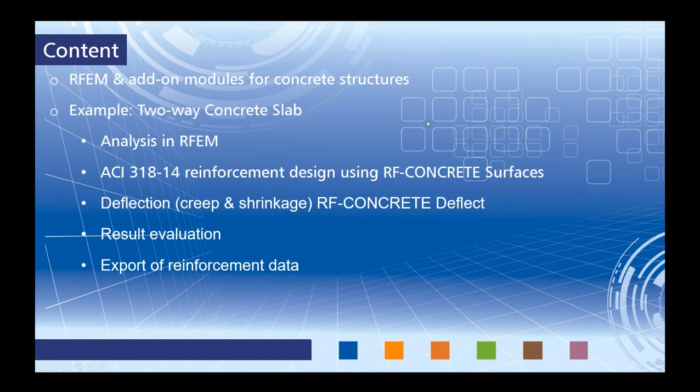And throughout the example, we'll be taking a look at our results, evaluating what they mean and how they can be applicable to our design. And then lastly, I want to show the export of the reinforcement data to a few other programs that you're familiar with, but that we do integrate, so that maybe you can do some reinforcement design details, some drawings in programs such as AutoCAD and other reinforcement programs.

So the concept of the add-on modules for concrete design. Our main program RFEM is where you're going to be doing all of your loading, your modeling. You can apply your load combinations according to different standards. We integrate with BIM software such as Revit, Tekla. And you can also run a full analysis in RFEM. So if you're just simply wanting the internal forces such as your moments to do your reinforcement design by hand, then by all means you can do this in RFEM alone.

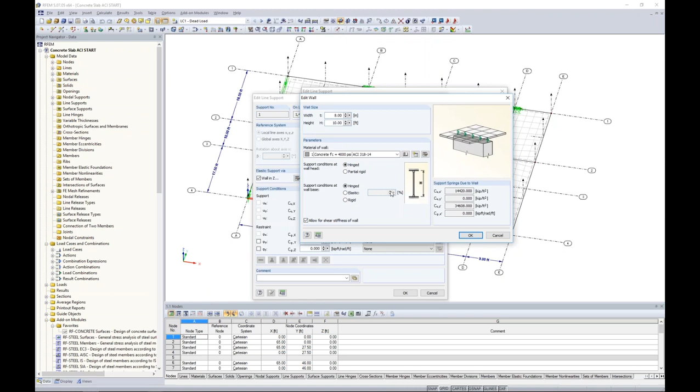So rather than manually entering in what should be these effective spring stiffnesses, you can take this all into account by filling out this edit wall parameters here. So it's a very useful feature.

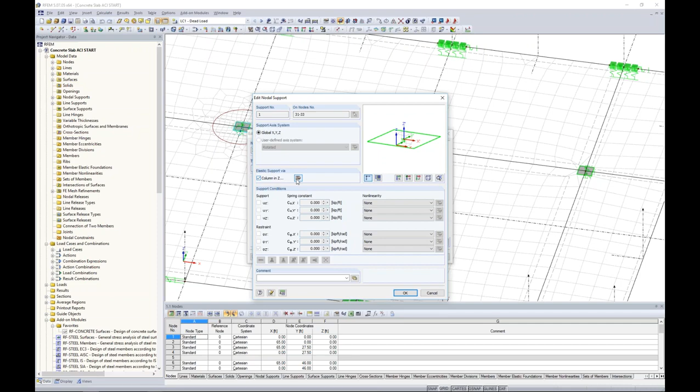And in the same sense, if I zoom in here, we'll assume that this is maybe some type of column supporting it from the underside here. If I double click on my nodal support and go into the details of this, I have that exact same option but to take into account a column instead of a wall. I go into the details here. Again, I'm just defining some of the geometric properties such as an 18-inch by 18-inch column. I give it a material, concrete, 4,000 psi, define the height as well as my support conditions at the top and the bottom. And then again, the program is coming up with these effective spring stiffnesses in both the translation and rotation global directions and applying it into the model.

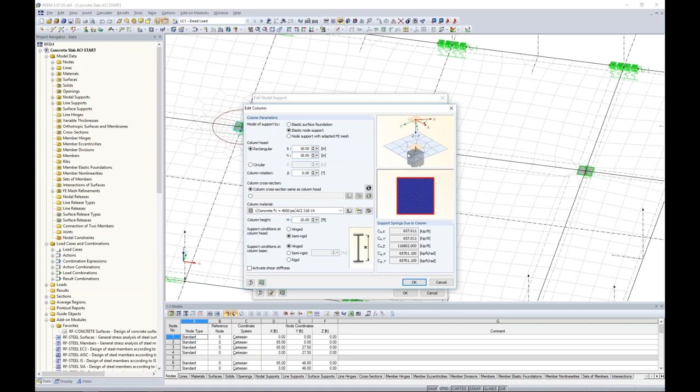So this is nice as well for issues like singularities. With finite elements, sometimes we get singularity where we're applying all of this load at this single node. Well, these specific types of supports help distribute that load over the column head, 18 inches by 18 inches. So essentially, those are just some automatic features we have in the program to take those other elements into account.

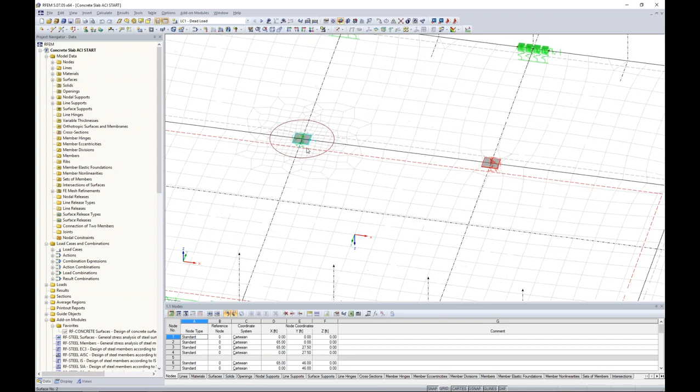You'll also notice that I have my finite element mesh defined here. The default is 1 foot by 1 foot. Maybe around these particular column locations, though, we'd like to define more of a smaller finite element mesh. Now, we could do so for the entire model, but the problem with that is that it's going to really significantly slow down our solve time. So that's why in RFEM, we give you the option for FE mesh refinements.

And what we have is FE mesh refinements about a particular node, maybe a line, a single surface, or a single solid. You can see for this application, I defined this FE mesh refinement about this node. I gave it a radius of 3 feet. I gave it a target FE length on the inner and outer sides. And then what the program is going to do is transition quite nicely from the smaller FE mesh into the larger FE mesh back into our global settings. So again, this provides a smaller FE mesh without slowing down our solve time because we didn't change the entire structure here.

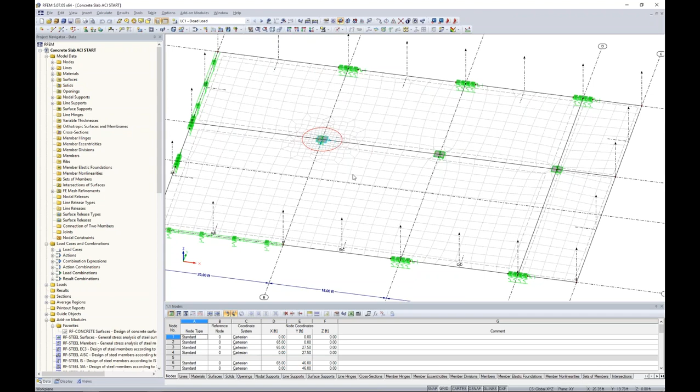Now, in regards to the ACI, it does tell us that we need to take into account some stiffness modifications for slabs. And again, if you were present at my webinar last month, we did the same thing for our columns and our beams. I'm just going to drag my selection box over all of my surfaces, right-click and select surfaces to edit all of them at once.

If I go to this tab called Modify Stiffness, the default in RFEM is set to none. Keep in mind that if you're doing any ACI design for columns, members, walls, or flat slabs, you need to modify this stiffness here according to ACI.

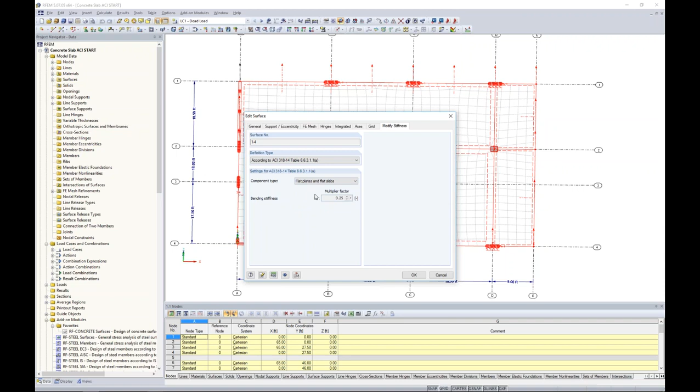We have this simple drop-down box, and now the only thing I need to do is select my component type. Last month we selected columns for our column elements, and we did a separate selection for our beams. For this example, we want to choose flat plates and flat slabs. This multiplies my bending stiffness by 0.25, which comes directly from the code to account for cracked sectional properties and reduce our stiffness. So we will leave all flat plates and flat slabs with this multiplication factor.

The other thing we get asked quite often is how to take into account a one-way versus a two-way slab. When I go to draw a typical slab surface element under my General tab, you can see my stiffness is set to standard. I've defined my thickness as 12 inches. A standard stiffness means a two-way slab - we have no boundaries regarding load distribution in any direction on this surface, so I'd consider that a two-way slab.

Now, a one-way slab, which is quite common as well, can easily be taken into account. Instead of the standard stiffness, we'll want to choose orthotropic here. You'll notice a few examples pop up when I choose orthotropic. I can use this edit parameters box, and a new dialog box will pop up to take into account these different stiffness modifications.

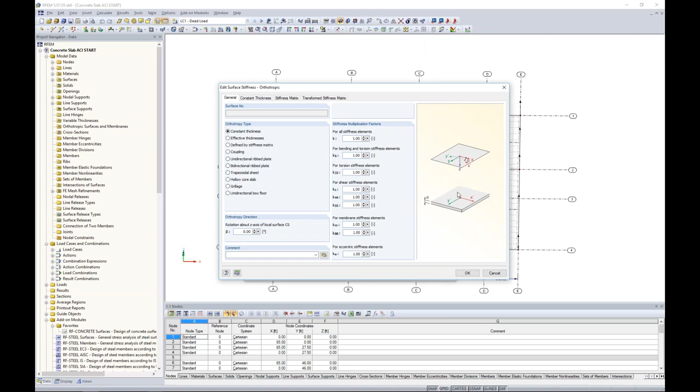The first one under this General tab is constant thickness, which is my standard surface type. There's not much going on here other than, in the same sense as the standard surface, I can now see my stiffness matrix. It's nice because it's divided into sections and very easy to read - we have bending and torsion, shear, membrane, and eccentric effects.

Back on this General tab, if we click the second option, effective thickness, I can click on this tab and define the effective thickness to control my stiffness properties in both the local X and Y directions. So let's say, for example, in my local X direction I'd like this to still be 12 inches thick, but in my Y direction I want to decrease that stiffness because I have this one-way slab spanning with load distribution in the local X direction. So for my Y direction, I can give this a thickness of 5 inches. Now my transformed stiffness matrix will take that into account - you can see smaller values for D22 compared to D11.

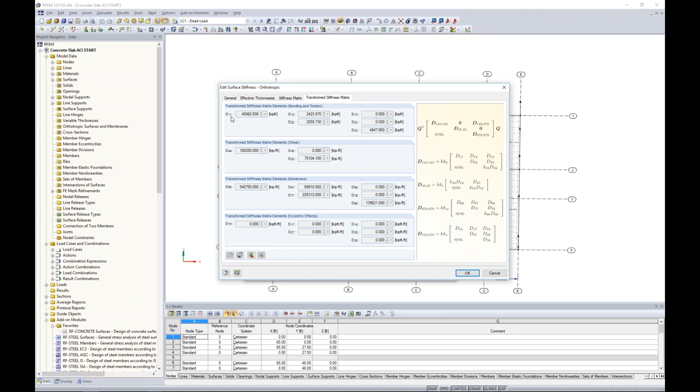Going back to effective thickness, what's also great is that we've changed our thickness, but what about other options such as self-weight? We've implemented an option down here under thickness to still take into account the full 12 inches for consideration of self-weight. So the only thing we're affecting here is our stiffness - that's an option for a one-way slab.

Now back on the General tab, we have a few other options - for example, defined by stiffness matrix. You can enter your own values here for your stiffness matrix if you know them. We also have a unidirectional ribbed plate and a bidirectional ribbed plate, denoted here by these pictures.

If I click on the second tab here, what's great is I only have to define the geometric properties. In this picture, I simply define these length directions in these value boxes, and the program will automatically calculate the transformed stiffness matrix for me. Something like a trapezoidal sheet might be useful for a metal deck.

We also have hollow core slabs and unidirectional box floor, so maybe something more like a box girder type application. Again, the only thing you have to define are these geometric properties, and the program will automatically take that into account for our stiffness.

We also lastly have grillage, which is maybe something more like a waffle slab, again just defining those geometric properties on this second tab here.

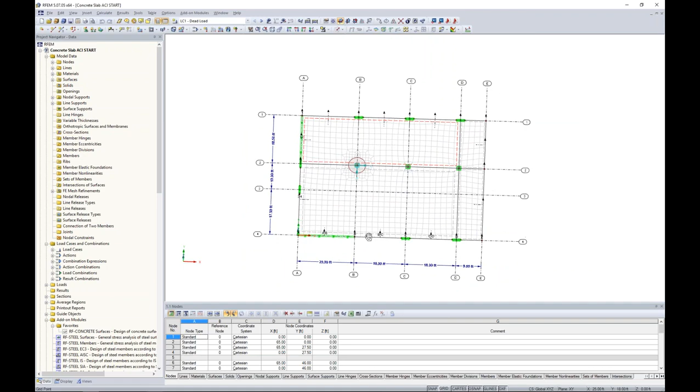One last thing to take a look at are our loads. If I turn this into the ISO view and turn on my loads, I can see that I have applied a dead load, a typical kips per square foot area load on all of my surfaces.

Now I also have 4 different live loads applied. If I scroll through these 4 different live loads, you can see they jump around on the slab. Maybe this is representative of something like office loading, where you might have some part of the structure loaded but not other parts. Maybe all of them will be loaded at one time.

This is quite a common question we get: how do we load our slab so we're not loading the entire slab, but maybe just a portion of it? That can easily be done with our free loads. Using our drop-down box, we have free concentrated loads, free line loads, rectangular loads, circular, polygon, and variable.

If I double-click on one of these free loads to open up the dialog box, you can see we have everything here. It's pretty self-explanatory. You just go through it one by one.

The first thing we need to choose is a projection plane, so we want to project this load in the XY plane. We want to choose a load direction, and you'll notice my little picture up here updates as I choose these different options, so it's nice I know exactly how I'm applying this load. I want to give it a magnitude, and then I simply click 2 locations on this slab to define my rectangular surface area.

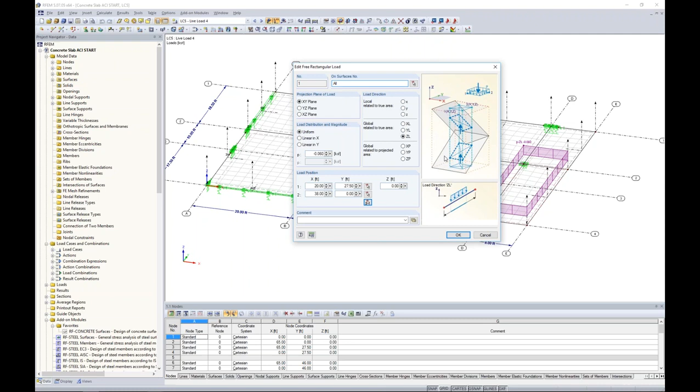We have the option to actually project down through a series of slabs depending on what plane you choose here. By choosing this option right now, it's set to all because it doesn't matter since I only have one plane in my XY direction. But if you had multiple surfaces on top of one another, you can choose those surfaces you want this load projected down onto with the click of a button, so you're not individually applying each of these free loads at each level.

Lastly, if we go to start a new model, or once I've created it, I can right-click on my model name and go into my general data. The program asks if we want to consider load cases and combinations according to a specific standard.

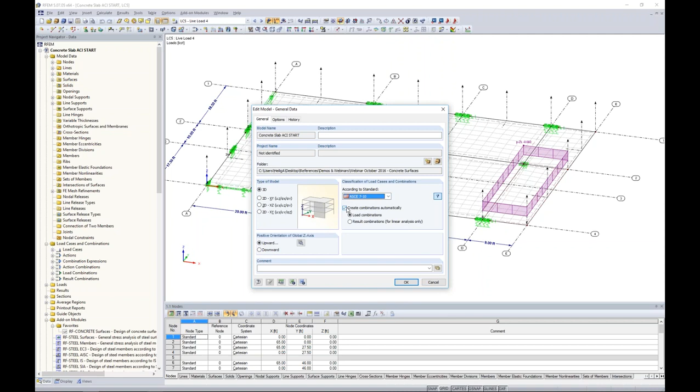We can automatically create these load combinations. We have the ASCE codes, the IBC codes, Canadian codes, as well as many other international codes. I have this checkbox checked on to create load combinations automatically according to ASCE 7. You can always turn this off and create your own manual load combinations, or you can do both.

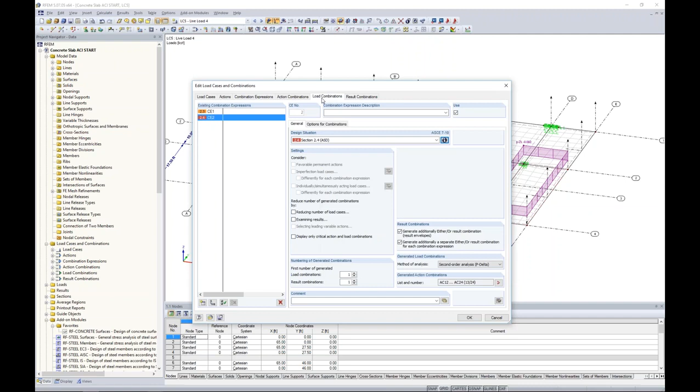For our load case, since we are doing ASCE 7 load combinations, you can see under my combination expressions that my LRFD load combinations will be created according to this orange box, and my ASD load combinations according to this red box. If I click this info button, it will show me which load combinations are taken into consideration directly from this code. Jumping to the load combinations, it's really drawn out here considering all of our applied loads.

I wanted my live loads to be applied in all different scenarios. Maybe live load 1 and 2 act at the same time, or 1, 2, and 4, but not 3. The program can automatically take that into account because under our Actions tab, I've set my live load as simultaneous. So basically, the program's going to come up with all the different scenarios these live loads can act together.

We also have options for alternatively or differently here. So then I have all my LRFD load combinations listed in the orange, and all my ASD in the red. Under my results combination, this is nothing more than an envelope solution for our LRFD equations and the envelope solution for our ASD load combinations.

So everything you've seen up till now involves RFEM. Like I said, we can easily run an analysis now to get our internal forces to do our design by hand. But the purpose of today's webinar is to show you guys how to utilize these add-on modules in order to do design according to the ACI code.

So the first thing I'm going to do is launch my RF Concrete Surfaces add-on module. For those of you not familiar with our software, this is an add-on module, nothing more than a simple dialog box that pops up within RFEM.

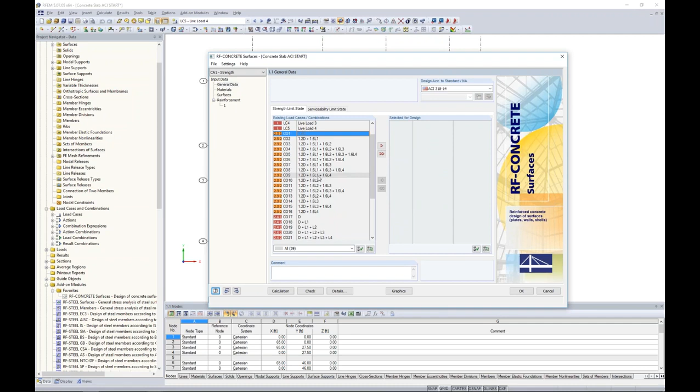Now, this particular first case that I'm going to run, I'm going to rename it. And you can see the default's just reinforced concrete design. I'm going to name this strength. For this first case, we're going to focus on just the strength limit state here. So what I first want to do is to select all of my LRFD load combinations for design.

You'll notice that I use the drop-down box here to select ACI 318. And then the only thing I need to do is just to simply work down this list here. So I have my materials list here, again brought in from RFEM, 4000 PSI, grade 60 reinforcing steel. I can quickly change this if I'd like to within the module. I don't have to go back into RFEM. All of my properties for my materials are listed here. I have a nice stress strain diagram for both my concrete and my steel.

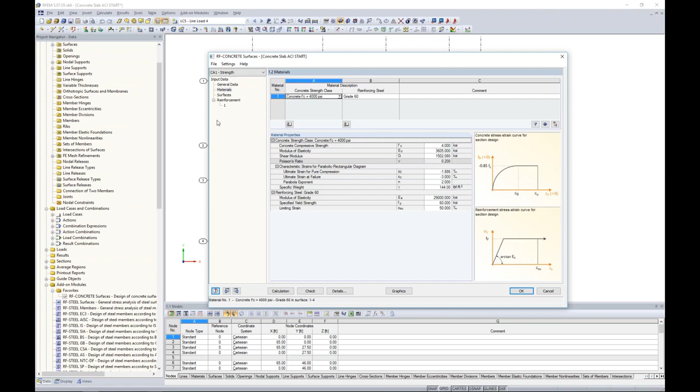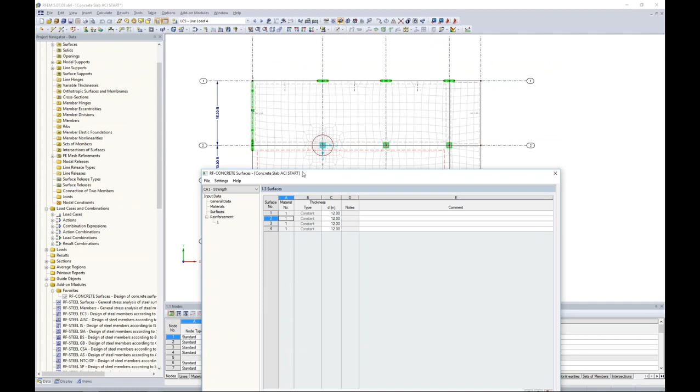Moving on down to surfaces, nothing too extravagant here. This will change later on when we're considering serviceability, but for strength, it just simply lists our 4 slab types and then the depth of each one. Notice too that everything with these tables is synced up to the graphics behind it. As I scroll through these different slabs, you can see the red dotted line highlighting which slab I'm actually clicking on in the table. And lastly, we want to jump to reinforcement.

For our reinforcement, you can create as many groups as you'd like. So perhaps you have different slabs with different loads, different thicknesses. Of course, you're probably going to want to consider different reinforcements for these slabs. You don't want to have a one-size-fits-all for everything. So we allow you to create more than one reinforcement group. And you can see here that right now I've applied it to all of my surfaces by checking this checkbox. But by all means, you can apply it to an individual surface, a group of surfaces, or all of the surfaces. For this particular case, we'll just choose one reinforcement group.

You can see here my reinforcement ratios on this first tab. There are a couple of defaults already set. You can change these. The ACI code tells us the maximum reinforcement percentage, basically this is to avoid brittle flexural behavior in case of an overload type situation. In the newer ACI codes, essentially, they've gone away with the reinforcement percentage, but now are more focused on the net tensile strain of the concrete being greater than or equal to

0.004. So what the code's telling us is that you can essentially mess around with these percentages as much as you want, as long as those net tensile strain limits are met. 7.3.3.1 and 8.3.3.1 from the code refer to both one-way and two-way slabs, and they both state the same thing, that that net tensile strain must be met.

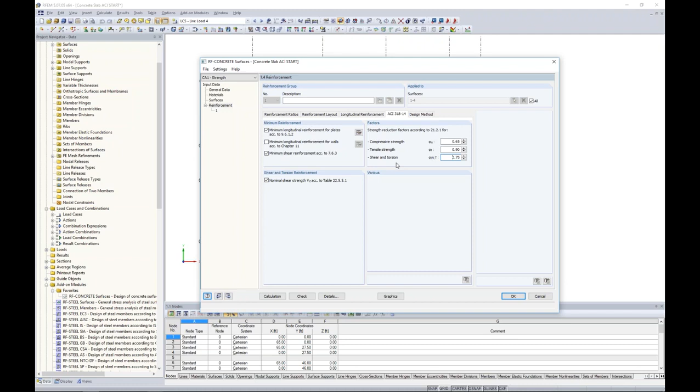ACI 318-14, this is just some standard references. Minimum longitudinal reinforcement for plates is selected right now. We also have walls if we were doing wall design. Minimum shear reinforcement and nominal shear strength, some standards here. Our strength reduction factors come from the code, section 21.2.1. If we've done any type of concrete design, we're familiar with what these strength reduction factors are, and the default is set to what the code calls us to do at the moment, but you can certainly change those as well.

Design method. Here we can design for optimization of design internal forces or no optimization. I have this left as a default for optimization of design internal forces. And the only thing that we need to do now is just to run a quick calculation. So what is going on in the background is that we're running all of those LRFD load combinations in RFEM, and it's bringing all of these internal forces into the add-on module so that we can get our reinforcement strength design. Then all of these results will be shown directly in this add-on module.

So you can see here that our results tab popped up down here at the bottom after we ran our analysis, and basically this total will just be a summary of what's required. I have my As1 in the top direction for both 0 degrees and 90 degrees. I have As1 and 2 in the bottom direction, so that's 0 degrees and 90 degrees, and then I have my required shear reinforcement. What's also nice is that we have this little design details button down here.

If I click this, this is all of the information that you could possibly need to understand where the forces came from, where the design numbers came from. You can see here that these are all collapsible, so you can really get into detail. What I really pride our program on is we're not a black box program. We get very few tech support questions on engineers not understanding where the numbers came from within the program. So we try and give you as much information as possible.

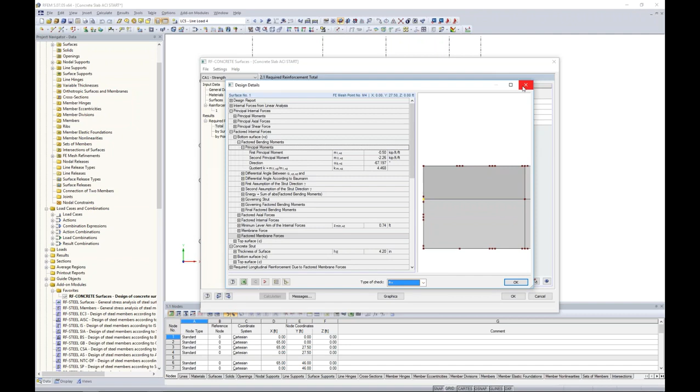And what's great too is that we even show you the FE mesh point, and we show you where you're at on your slab surface. So this is our slab surface that came from RFEM. You can export all of this information to Excel at the click of a button to do some further sorting. You can print this information. We can easily jump to our longitudinal reinforcement down here for both top and bottom, and to our shear reinforcement. So again, if you have any questions about where this design information came from, that's probably available in these design details.

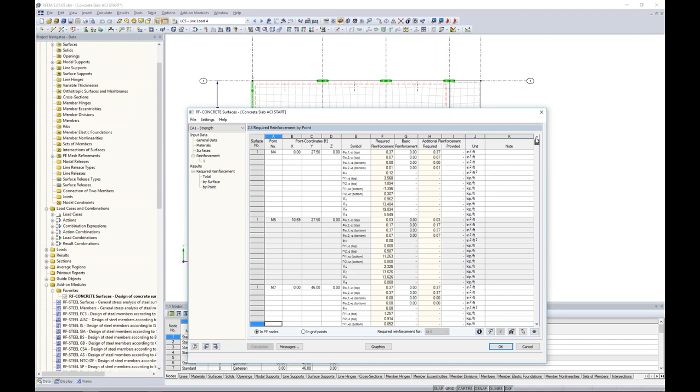We can also view this reinforcement design for each surface. Again, we synchronize the table with the view in the background in RFEM. So this big red arrow is always going to tell us where we're at according to this point number here, and the surface is highlighted as well, showing you which surface you're looking at, which is surface number 1. And then we can view it by point. This is a rather extensive table, as you can see. These are the different FE mesh points throughout the program. Again, as I click through them, the picture in the background will sync with where I'm at on the table.

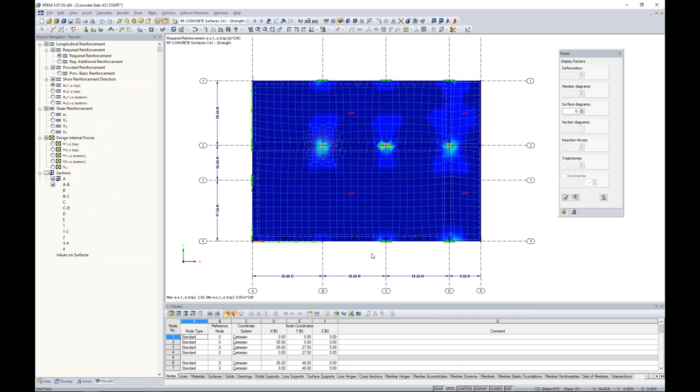So this is all great in terms of tables, but probably we want to view something graphically to kind of get a sense of what is the overall behavior of our slab. So all I need to do is just to click my graphics. Now, looking at my slab, you notice that I have these nice contours now. I now have this Results tab available in my Project Navigator.

I know I'm in my Concrete Surfaces add-on module still because, as you can see, I have all my different load combinations, but we have RF Concrete Surfaces selected in our drop-down box. Now, I can see my required reinforcement. I have my nice table here to show the different contours and in inches squared per foot, what exactly is going on.

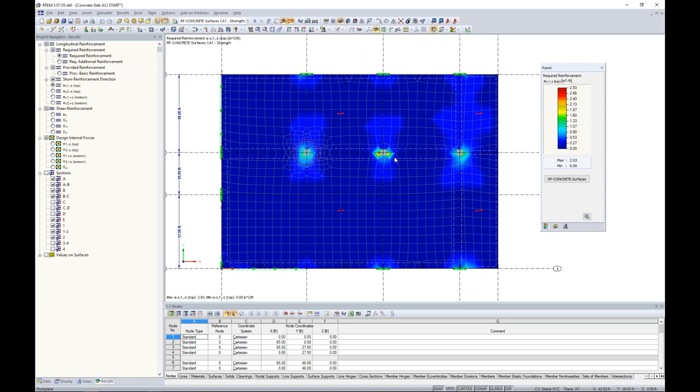If I take a look at my reinforcement direction, I have this red arrow indicating which direction my reinforcement is spanning. Now I can scroll through my AS at the top in the 90-degree direction. And it makes sense what our contours are showing here. For our top reinforcement, we're going to need more around these column and wall supports because we have a negative bending moment. So we're going to need more reinforcement in our tops.

Now, if we look at the bottom reinforcement, it's going to make sense that we're going to need more reinforcement at the areas spanning between our supports because this is an area of positive moment. We can also view AS bottom in the other direction, and you can see here that we have quite a bit more reinforcement needed for this direction.

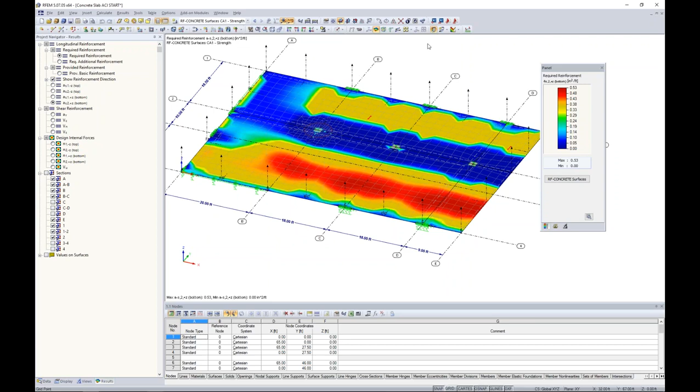So contours are great, and I think it kind of gives you more of an overall sense of what's going on, but we also have an option for sections in the program. And what a section will do, and that's what these black lines indicate here, I went ahead and created some different sections throughout the slab. This is basically a cut right through the center of the slab. And the first thing that we can do, we can turn off our isobands for our results.

And to create a new section, I can just simply go here to create section numerically. Now the program's asking me if I want to name it. It's asking what should we put the section through? We want to put it through a surface. I just simply need to click 2 points. I can always use my drawing grid to make sure I have a straight line here. And then just the projection direction here.

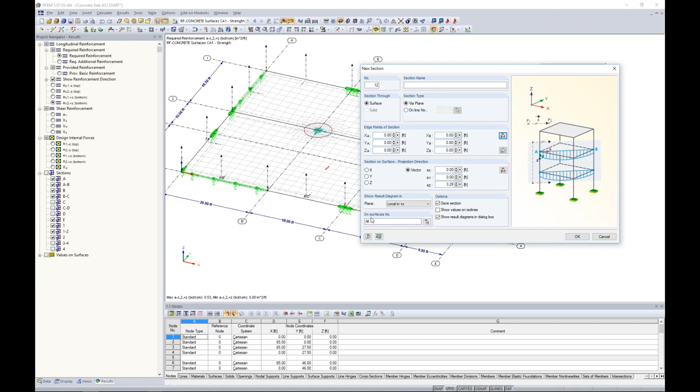And what's also great is that we can select all surfaces here, or maybe we only want to view this section for a particular slab. Well, everything is in your control within this dialog box. So I went ahead and already created these sections, as you can see in both directions, and then we can just simply turn on our sections at the click of our button instead of the isobands.

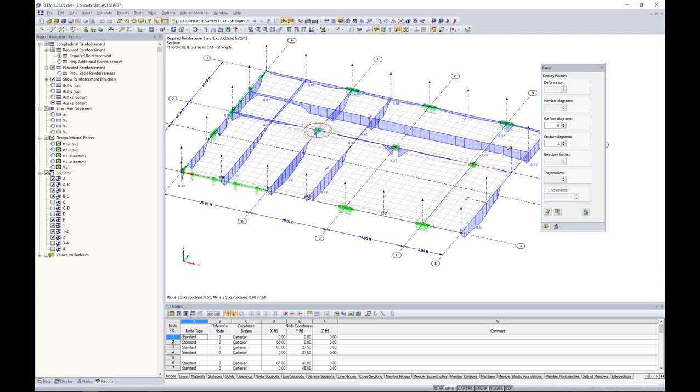Then we have the sections over here, and here is where I can really control what I'm looking at. You'll notice that right now I have my reinforcement direction for my as2 bottom, so I can see my reinforcement is spanning in the north-south direction. But now I'm getting more of a numerical value to look at rather than contour lines.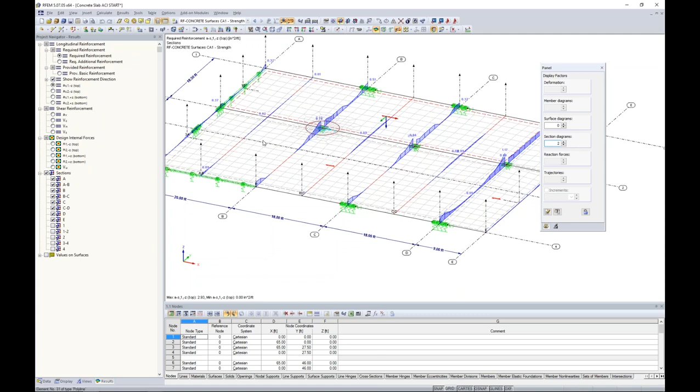So I can see here, if we go ahead and turn on a few of these other sections across the slab, if I'm looking at my top reinforcement and I increase this section diagram, it makes sense that I'm going to need more reinforcement again around these column supports because we have negative bending moment. If I take a look at my AS1 bottom, you can see I have significantly more reinforcement required at areas spanning between the supports.

And with these sections, it's nice as well. I can always right-click and go to my results diagram, and I can view it more so along the length in quite a bit of detail, more as numerical values. I can add in as many diagrams as I want. Let's say I want to view this section for both top and bottom, and in both directions, 0 degrees and 90 degrees along the length. And now I can really compare what's going on in all my reinforcement directions.

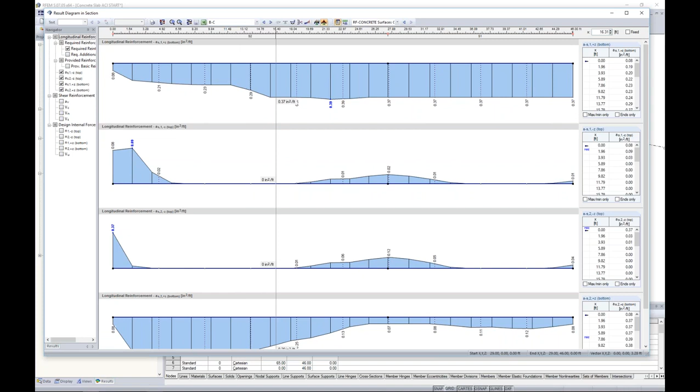You can print this off as well, and quite a few quick links here. I can switch my sections at the click of a button. I don't have to necessarily go back to RFEM. I can also export directly to Excel. So that's certainly a useful feature if we're wanting to view things more as numerical values rather than contours.

Okay, so now that we've done a basic strength design, we want to move on to a service design. So I can easily jump back into my add-on module by going to this drop-down box here and choose current module. And I'm now back in my concrete surfaces.

So for this option, I'm going to choose copy case. And what the program's going to do is it's going to copy my strength load case, and I'm going to rename it strength and service with some basic reinforcement. So now I'm going to design for both strength and service, and I'm also going to take into account some basic reinforcement design. I click OK.

So now you can see that I can jump back and forth to both cases. And by all means, you can do all of this within one case if you like. I'm just trying to show you guys a clear, distinct difference between all the different areas that we're applying these different design applications. So now we're under strength and service. I go under my serviceability limit state, and here is where I'm going to want to select all of my ASD load combinations.

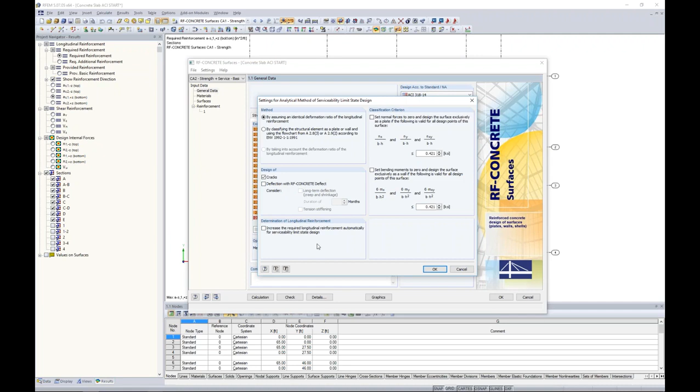So now that I've defined a serviceability limit state, my materials, everything's the same here, but notice my surfaces tab has a few more options. The tab down here, limit of crack widths. So the first thing that we want to do with our serviceability is to tell the program, well, what are my limiting crack values? What can I base this ratio off of, and what's limiting the total width of the cracks based on the applied load?

So the ACI committee did quite a bit of research and determined that, depending on where your structure is located, there are some crack widths that we can follow for limiting dimensions here. So for our example, maybe we consider our structure in a very humid environment. Well, then I'm going to set my crack width under this selection as 0.012 inches. Now you want to control both the top and the bottom. You can certainly set these as different as well, but for our case it will be 0.012. We can also choose user defined. Maybe you have a different limiting value that you'd like to put in here. You can do that as well.

Design without direct crack width calculation according to 24.3.2. The ACI code tells us in section 24.3.2 that it's not so much a given equation for what we should limit our crack width to, but the code tells us that we should really limit our spacing of our longitudinal reinforcement to decrease the cracking of our concrete. So by having this selected, the program will know to follow the stipulations that the code calls for in this section to limit our spacing of our longitudinal reinforcement.

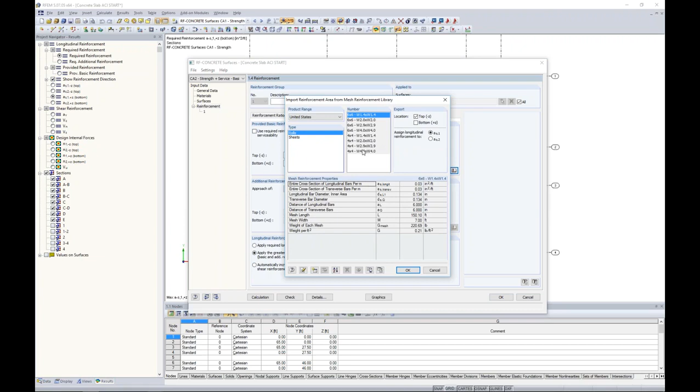Now, if you jump down to the United States, we have welded wire fabric reinforcement already an option to select here within the program. I know when I did design for precast concrete bridges, we only used welded wire reinforcement. So this is nice that you don't have to manually apply these specific properties of our reinforcement, but you can bring them up from this library directly here.

For our example today, we'll probably be using reinforcement bars at a specific spacing. So that will be this option right next to it. You can see here that the only thing I need to do is to specify the diameter of my rebar. So maybe if we try number 6s, we'll use 0.75 inches for our diameter. And the rebar spacing, let's try 10 inches on center. And I'm going to apply this to both the top and the bottom, and both the 0 degrees and 90 degrees. If I click OK, you'll see the program automatically fills in the reinforcement area for all directions in both the top and the bottom.

Additional reinforcement for serviceability state design. I have a little drop down here, and if I click on this info button, this gives me a little bit more information of exactly how this is being applied. Right now I'm just applying the provided basic reinforcement across the entire span of my slab, and then any required reinforcement will additionally have to be taken into account.

With that, everything else stays the same, and we can easily run our calculation. Now, something to take note of, it will take a split second longer because now we're running all of those ASD load combinations as well for our crack width design. And we're still running LRFD to get our required reinforcement design as well. And it will bring all of the results back into this add-on module directly.

So as we saw last time, we have our required reinforcement. Nothing should have changed here because we didn't change anything in our external model in RFEM, but now we have a serviceability design available here. You can see that I now have my crack width control, my crack width ratio. I have my green smiley face because I am well below my design limit value that we set at 0.012. My existing value is 0.006. And you can see where this comes from, the Gergely-Lutz equation that I explained before. We're actually calculating a specific crack width. We're also meeting the allowable spacings according to the code that we set in the limiting factors as well.

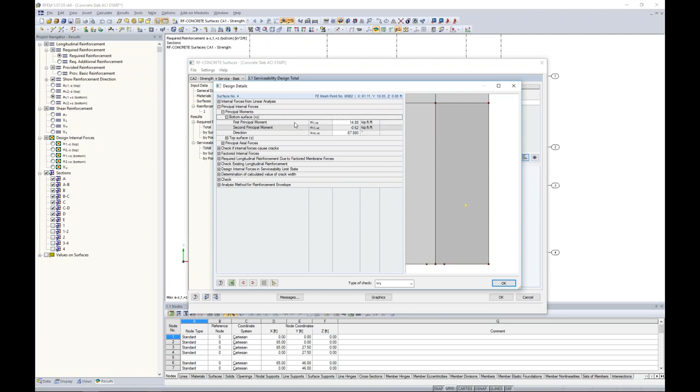Again, you can press this info button to get all of the possible information that you need and which location you're looking at exactly for how those calculations were derived. We can view each one by surface again, just like how we saw in our required reinforcement. Now we can view the cracks at each particular surface, and we can also view them by point. Again, we can jump to our graphics view here, and I'm going to turn back on my ISO bands, turn back off my sections, and now we have this whole serviceability limit state design.

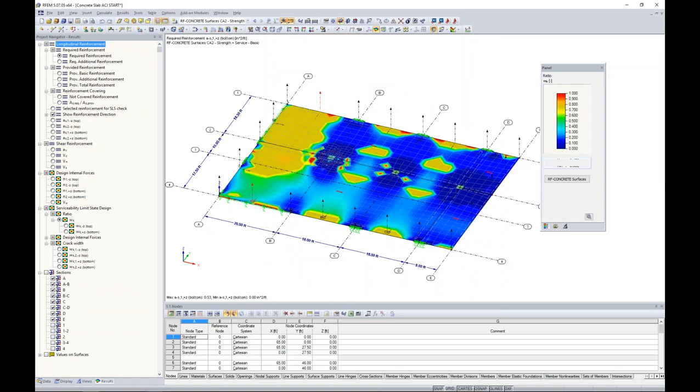So I can actually view my contours for my crack widths as ratios. So you can see here nothing is in red, so nothing is greater than 1. I can view each crack ratio by the top, and this kind of makes sense what we're seeing. We would expect cracking to occur on the top near the columns where we have negative bending. As for the bottom, again, this is exactly what we'd expect. We expect to have cracking in between our supports on the bottom.

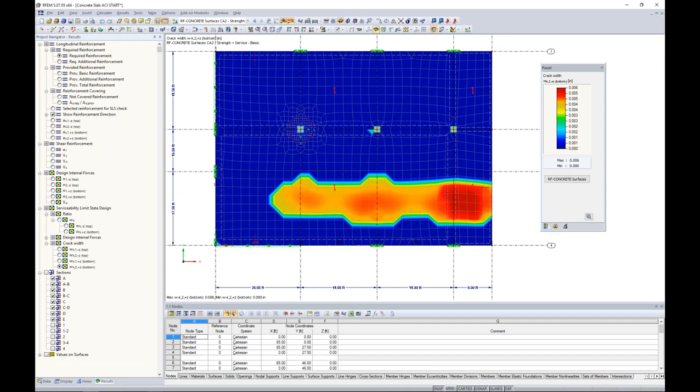We can also view the crack width numerically according to the Gergely-Lutz equation for both the top in either direction and the bottom in either direction. And just like before, we can always turn on these sections here, turn off our ISO bands, and view them more numerically if we'd like. So that's also an option. So turning back on the ISO bands, and now that we've seen the serviceability design, we did add in some basic reinforcement. So we now have some additional options up here.

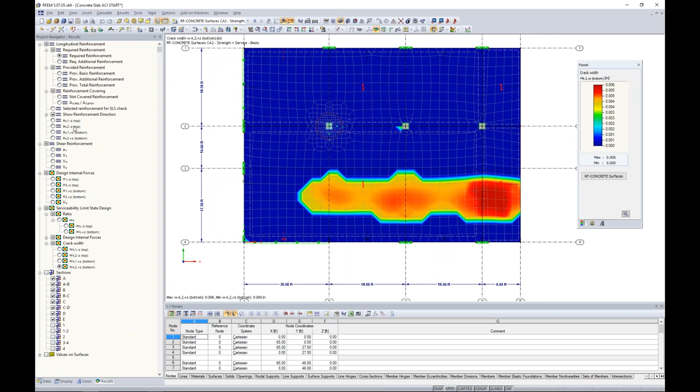I have my original required reinforcement for, let's say, my top and my bottom. This is nothing different than what we saw before. But now you'll notice under my provided basic reinforcement and my little panel here, it's telling me I now have 0.53 inches squared per foot across this entire slab. No matter which direction I change it in, it's still 0.53. That's because we applied the same number 6s at 10 inches on center, top and bottom in all directions.

Now, here's where the fun part comes in. So we provided these number 6s at 10s, but how does that compare to our required reinforcement? Well, we have a nice feature here called As required over As provided. This is showing us our ratios.

If anything is over 1.0 here, we know we have some issues to deal with in terms of adding more reinforcement. If we jump to our top reinforcement, we obviously have some areas near these columns and wall supports that we simply need to add more reinforcement to.

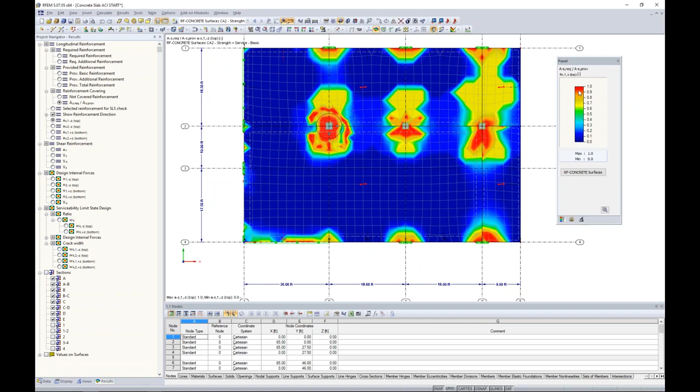The number 6s at 10 are not meeting what my requirements are. I can see that based on these contour lines. Same thing with AS top in the other direction, and then I can view my bottom as well. The bottom's a little bit better, but maybe we have some overstressed situations down here where we have a longer span. So how exactly do we deal with that?

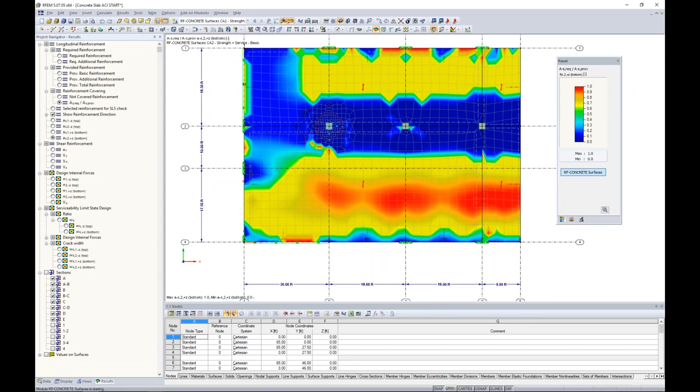This is where we want to jump back into our RF concrete surfaces add-on module. Under reinforcement here, and longitudinal reinforcement, this is where we're going to provide some additional bars at a specific spacing, maybe around those columns and wall supports. Under the Details tab and the Reinforcement tab, we have either the automatic arrangement of our reinforcement or the manual definition of the reinforcement areas.

I'm going to choose manual definition, and you'll notice that the display really changed quite a bit when we selected that. We now have this provided additional reinforcement. This is great for you as an engineer if you want to have a lot more control over where you're placing your specific reinforcement, if you want to tell the program, hey, this is what I'm going to put in, can you tell me if it meets what is required?

You'll notice that I have my provided basic reinforcement still here. We can certainly leave this in here and it will be applied to the entire slab just like what we had done before. But I'm actually going to zero these out because I'm going to apply these number 6s at 10 inches on center manually. We again have several options here: we can apply it as a rectangular reinforcement, polygonal, or circular. So we really try and step outside that simple box - if you have a structure that requires a circular reinforcement area, it's no problem in the program.

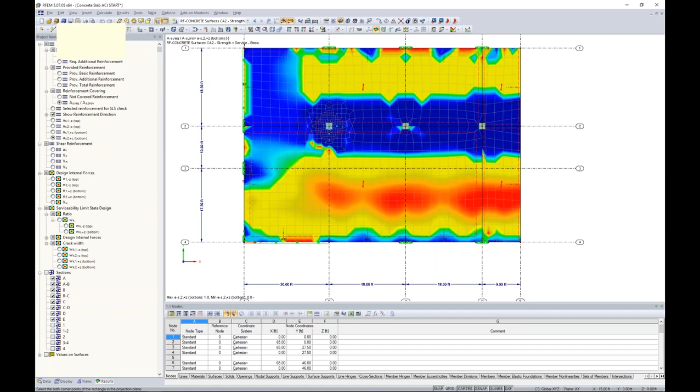We can pull out this welded wire reinforcement if we'd like according to these rolls or sheets, or we can define our diameter of our rebar at 0.75 at 10 inches on center. I want to apply this to both the top and bottom in the 0-degree direction. I simply choose my 2 points to apply my number 6s at 10, and I'm going to choose the entire slab here. I click OK, and now I have this table available that shows I've applied to both top and bottom in the 0-degree direction, number 6s at 10 inches on center.

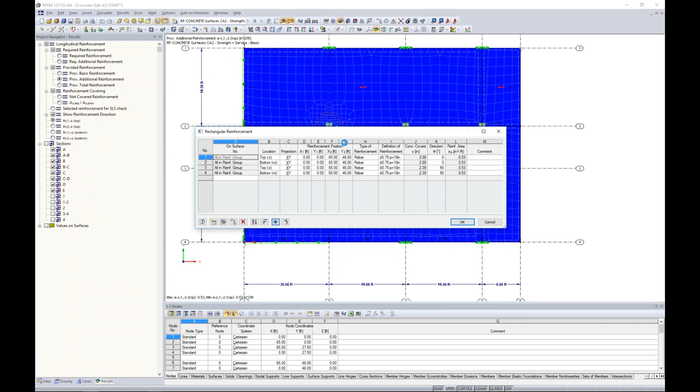I want to also use that same dialog box, but I'm going to change that to 90 degrees. The program remembers my input from last time. I click OK, and now I have top and bottom in the 90 degree direction. The other thing to take a look at is we can view all of this visually. So now if I turn on my panel here, I can see I have 0.53 according to this table in all my different directions.

Now the whole purpose of this was to add some more reinforcement around our columns. So I'm going to go back into this dialog box, and I'm going to change this back to 0 degrees. Let's say around our columns, we maybe will want number 8 at 8 inches on center - so quite a bit more reinforcement there. Our diameter will be 1.0, and our bar spacing will be at 8 inches on center.

Now, instead of selecting 2 specific points, we can use this other option to select a rectangle. Now I can select the center of my column and simply expand this out so that my additional reinforcement is now as a rectangle around that particular column.

I click OK and look at my table. It's existing here in the 0 degree direction. I want to do the same thing again, so all I have to do is change this to 90 degrees. You can also use some copy and paste options in the table.

I think it's easiest to just go into the dialog box again. That's the most user-friendly way to do it.

Now if we view this, we can see that we have our additional reinforcement around this column. We can see the total number in inches squared per foot for both the top and the bottom. I can view all these different top and bottom views back in RFEM while I'm still looking at this table.

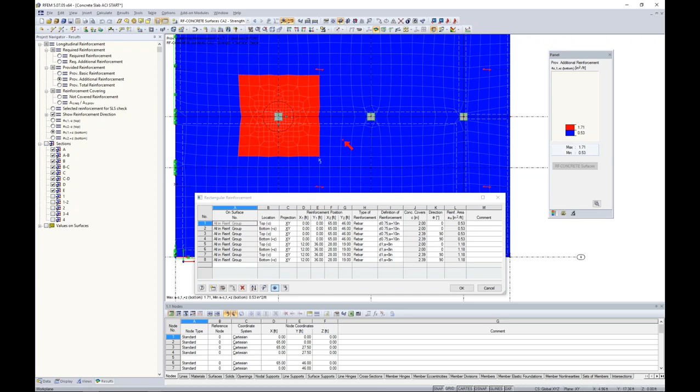If I just highlight my last 4 rows that pertain to this particular column, we have a move or copy feature. What I can do is select one, copy, and all I need to do is click from one column to the other to define my displacement vector. I click OK, and now all of those options from this first column were also copied to the second column.

So a very quick, efficient way to do this when you have a lot of repeat areas, such as columns like these, where you simply need to have the same reinforcement at all locations.

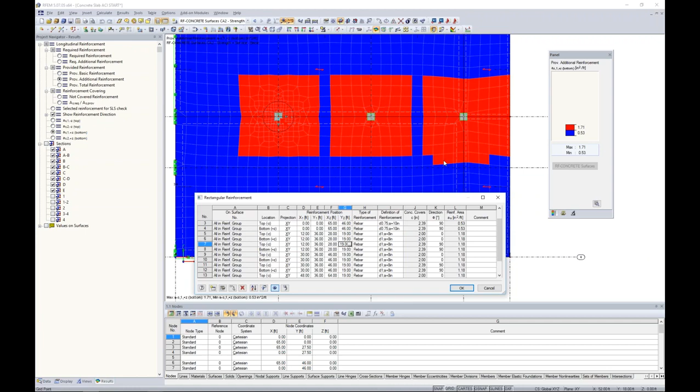Now I can do the same thing for my last column with my move and copy. By just selecting my displacement vector, I click OK, and easy enough. Again, you'll see that it really is applied to the FE mesh, not as a perfect rectangle.

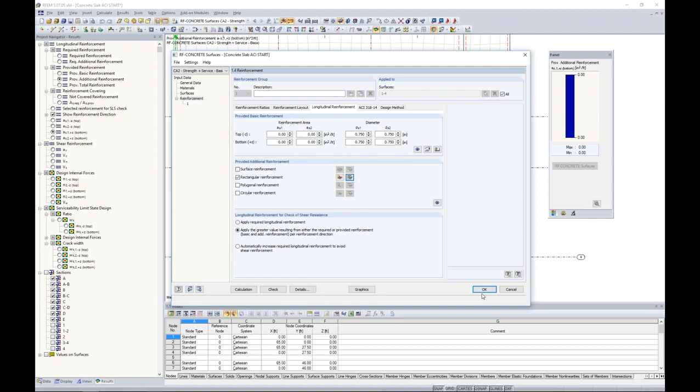So I probably want to do the same thing at my line supports here for my walls. We had some high bending moments at these locations, so I want to do the same thing, but rather than take the time during this webinar to copy and paste and draw those all in, I'll just pull open another model where I've already done so. You can see here that I did the additional reinforcement to all of the wall locations.

You'll also probably notice I left this column blank, and I just left it at the number 6s at 10 inches on center, and there's a specific reason for this. I want to show you guys back in RF-CONCRETE surfaces.

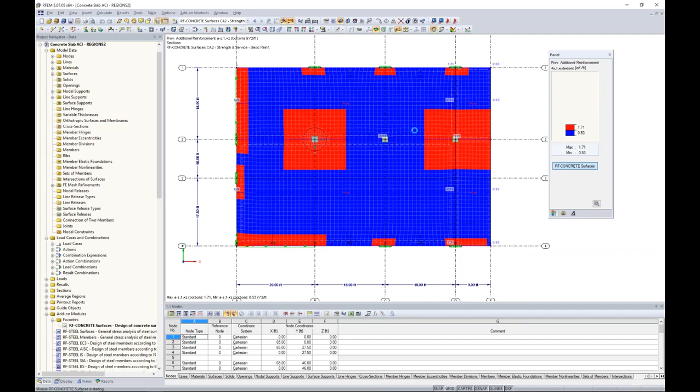So now that we've applied this to our different locations under my longitudinal reinforcement, you can see that my table is much more extensive here, much longer than what we saw before.

Now that I've defined these, I can go and run my calculation, and I can take a look at my same reinforcement results, total. For the total required reinforcement, I still have my crack width telling me here what my serviceability design is, but you'll notice that I have...

...something here. I have a message, 225. 225 down here, or I can click here, is telling me my longitudinal reinforcement in one direction is not sufficient. No check possible. Well, the reason for this, if I go back into my graphics and we take a look at our required reinforcement...

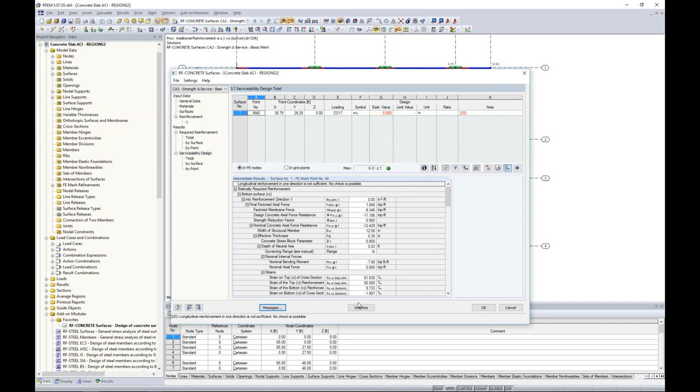...again, this is nothing different than what we've already seen in our other add-on modules. We can smooth the color transition here to make it look familiar to what we saw before.

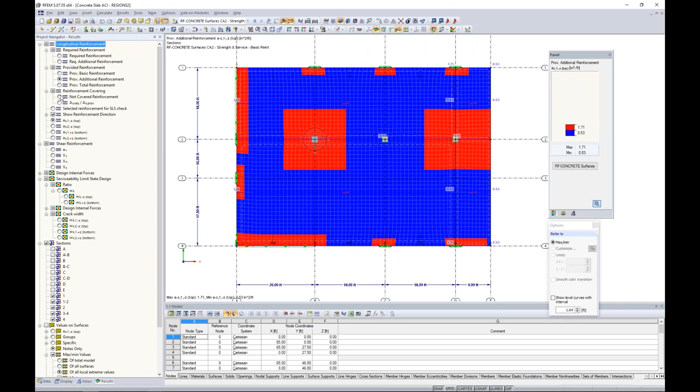But now for my provided reinforcement, I'll click on my provided additional reinforcement here. This looks familiar to what we saw before. How about we take a look at the not-covered reinforcement?

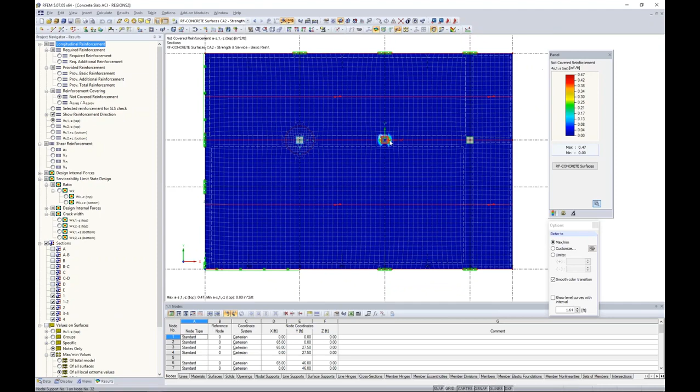I'm at my AS1 in the top direction, spanning left to right, and everything looks to be zero, but that column location where I specifically didn't increase my reinforcement. So the program is smart enough to tell you that you simply don't have enough of your provided reinforcement to meet what we found for the required reinforcement, and that's specific to this column location.

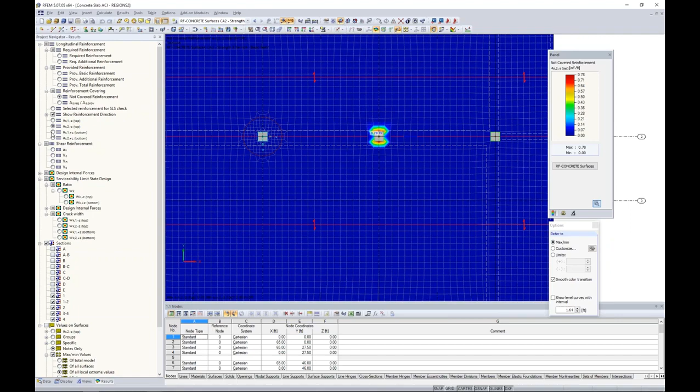If I look at the AS top in the other direction, same type of scenario. You'll notice these other columns are okay, because we provided quite a bit of reinforcement there. If we look at our bottom, you'll notice that everything is zeroed out, looking just fine with the provided reinforcement in both directions for my AS required over AS provided.

I can even look at those ratios again, and you can see quite clearly where we've added more reinforcement and where we haven't. You can see all of the red still occurring at this particular column. So how do we deal with that?

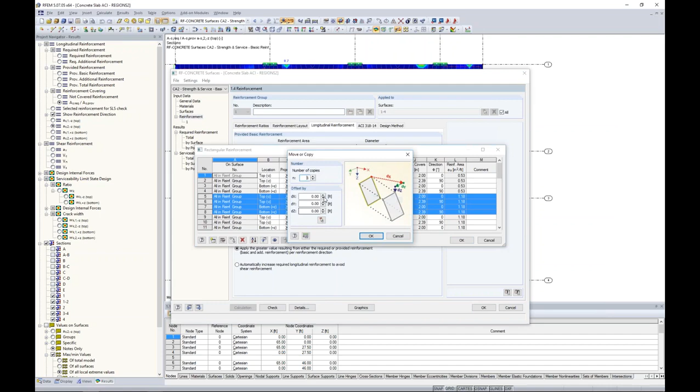That's no problem, that's exactly what I was showing you guys before under longitudinal reinforcement. Maybe I want to take my rows here, 5 through 8. I'm going to use my move and copy tool, select my displacement vector, click OK, and view this graphically. Now we have additionally applied all of this reinforcement to this column.

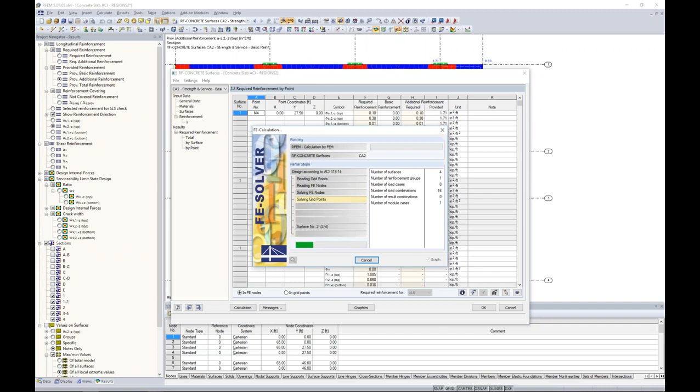You'll notice that I don't have to solve for my strength load conditions again. That's nice because the provided reinforcement can automatically be calculated by the program without an additional calculation being run. We do need to run the serviceability load combinations just to see how that reinforcement affected it. So we can quickly run our ASD load combinations to get our serviceability limit state design for all of our surfaces.

So now when we jump into our serviceability design, we can view our cracks. Everything looks good just as we expected. Now we have an actual reinforcement layout, maybe according to how our slab would actually be reinforced, and we just want to make sure that it's meeting this required reinforcement based on our applied loads.

Okay, so that essentially sums up strength and service design. Now the last thing we want to do is consider our deflection. Jumping back, we're still in our concrete surfaces add-on module, but I'm going to create another load case. I'm going to copy this case, and I'll call it deflect.

Now you'll notice that I still have my serviceability and strength limit states remembered here. Under my analytical settings, where we initially disregarded our RF-CONCRETE Deflect, I'm going to check this now, and I'm going to consider long-term deflection according to creep and shrinkage for a duration of 60 months.

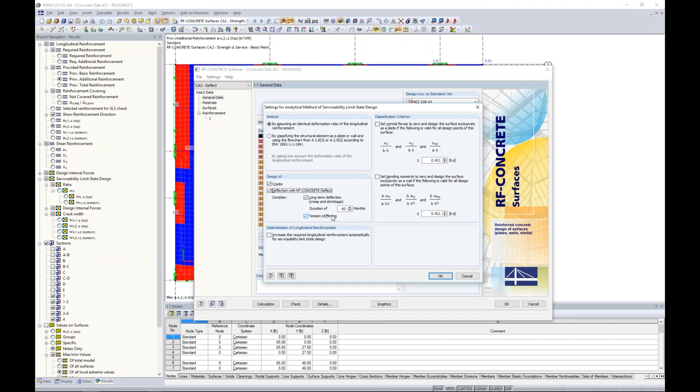So tension stiffening is basically a consideration of the stiffening effect on our concrete in tension. Additional tensile strains beyond zero strain in the concrete will be considered when we have this checked, and the default is to have this checked on. I click OK.

Now when I jump down to my Surfaces tab, we have another option here in addition to our crack widths. It's called Deformation Analysis. This is great because the code tells us we have some max possible deflection ratios that we want to meet for our slab design. This comes from table 24.2.2.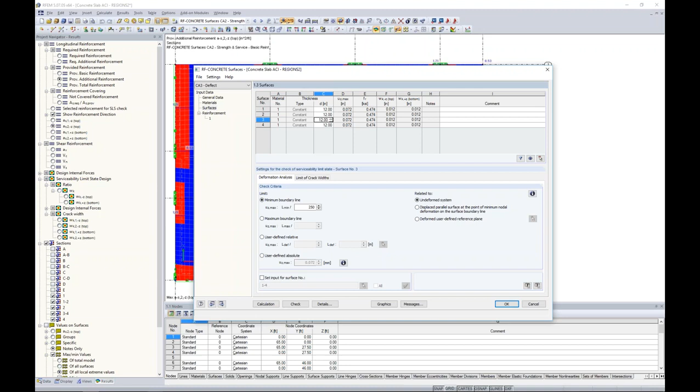Rather than defining the deflection ratios for all my slabs at one time, I'm going to uncheck this box and check them individually. The reason for this is why I created 4 different slabs, because we have 2 cantilevered slabs out here that are going to have different deflection limits than our interior slabs that are simply supported.

So for my slab number 1, I'm going to choose a user-defined relative deflection ratio. Maybe we want something like 240, which comes from the ACI code, and then I just simply need to define a reference length here. So my first slab, I will just use my measure tool. It will come out as 18.5 feet.

Now, slab number 2, same exact scenario, maybe L over 240 is my limiting deflection. Here I can measure the side of my slab, which comes out a little bit longer at 27.5 feet, which we can see here from our dimensions that were drawn in.

Our cantilevers, a different scenario here. Our deflection ratio is maybe something more like L over 125. And we want to measure from the edge of the support to the cantilevered end. Same thing for slab number 4, user-defined L over 125. I can easily type in 9.5 feet here, or I can measure it again.

Now, what is the deflection relative to? Most of us are probably familiar more with relative or absolute. Absolute is going to be in reference to the undeformed system. So basically, are our deflection ratios from what the original structure looked like before loading, or are we going to measure the deflection ratios and take a look at the deflected end nodes of the 2 surfaces?

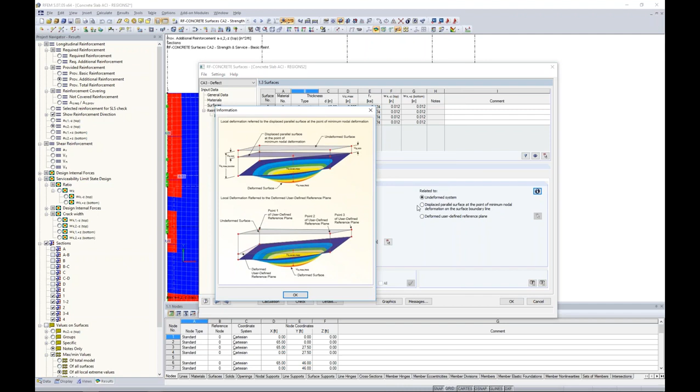We have a nice little picture here that explains a little bit more if you want to understand what exactly these settings correlate to. Typically, we'll use the undeformed system, and I will just leave that as the default. Reinforcement design, remember we're keeping everything exactly how we had it selected before, so we don't need to make any changes to that. So the only thing I need to do is just hit my calculation button here.

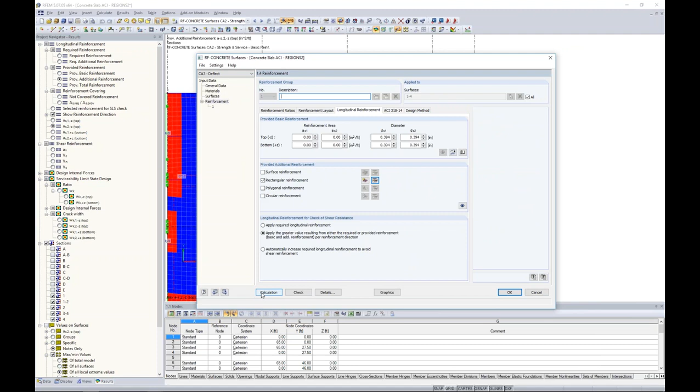It does take a split second longer to calculate, so I went ahead and already solved this for the sake of time. If I were to run my calculation, what would pop up is exactly what you're seeing here. I moved down to my serviceability design, and now in addition to my crack width, which we were just fine on, we're at 0.2 now, I have my deflection ratio. I have a red sad face here because we unfortunately are over 1.0 for our deflection.

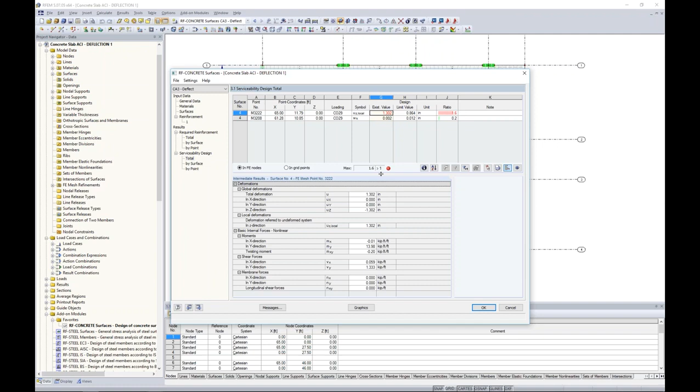So the question is, where's our problem? How can we really view this? Well, I can view it still in my tables by my particular surface. It looks like surface number 4 is the issue, and the program will sync with exactly where this problem is. It's the cantilevered slab over here, at about this center point where we have an issue.

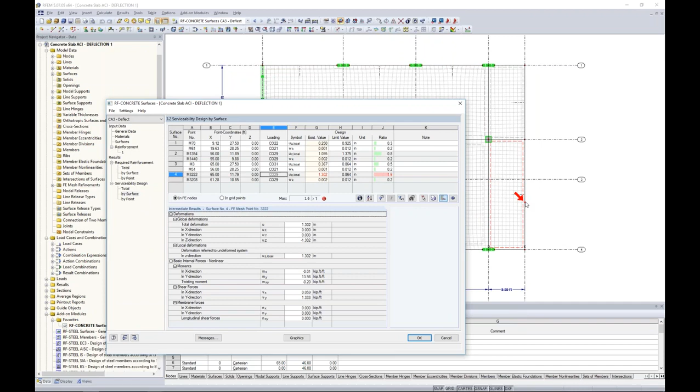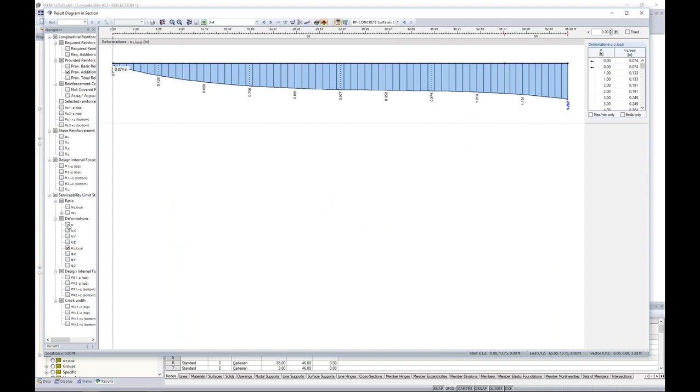Maybe we want to jump to our graphics here, and again we can view our deformations in terms of our local deformations. We can see that this is certainly an issue when we're looking at our concrete design. I can even turn on my sections here to take a look numerically by turning off these ISO bands. We have a deflection of 1.262. I can view this again by going to my results diagrams to view everything graphically, and add any more of these deflections that I'd like.

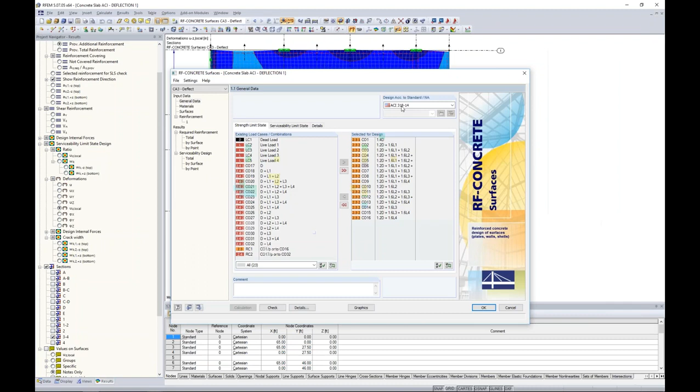So how do we solve this issue with deflection? Well, there's quite a few options here. Reinforcement may control some of it. Obviously, we want to take a look at our applied loads, but probably the easiest way is just to jump back into our RF-Concrete Surfaces add-on module, go to our Surfaces tab, and our original thickness of our slab was set at 12 inches. Maybe we just want to increase this to 14 inches.

And you can do so directly in the add-on module. I don't need to do it in RFEM. What's nice about this is if we're just playing around with the structure, seeing what works and what doesn't, I don't have to keep going back and forth into RFEM. I can do everything within this add-on module.

You'll notice I get this notes message down here. I can check my messages. It says the thickness in RFEM and RF-CONCRETE are not identical. This is just a little warning in the program telling you that if you were to go back into RFEM and do any more type of analysis, you'll want to change that surface thickness to 14 inches as well in there, just so that if you're doing any other type of analysis outside of this add-on module, it will

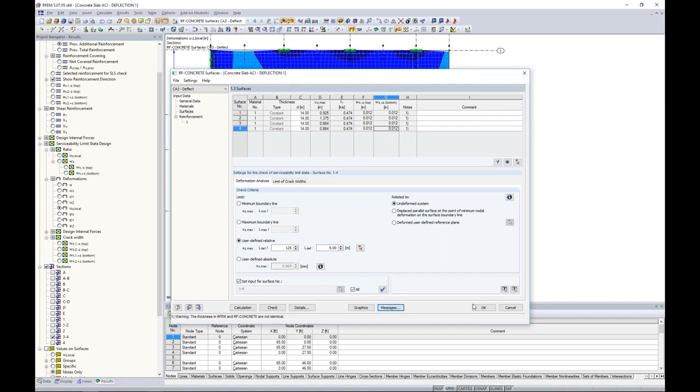be taken into account. So now I just want to hit that calculation button again, and once again, for the sake of time, I've already solved this, so I'll open up my other model here, and I jump into my RF-CONCRETE Surfaces. And let's say we were just running our analysis here. Again, you can see I'm using 14 inches for the thickness of my concrete slab. And now under my serviceability design, I have my green smiley face.

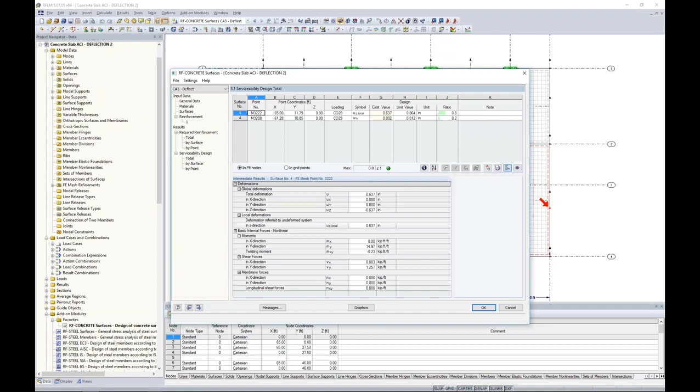He's telling me that, okay, your design limit value was 0.864. After I increase the thickness of my slab, I'm now at 0.637. So everything looks great in regards to my checks in terms of serviceability. And we also know that we're already meeting our strength demands for our required reinforcement. So essentially, our surface design is done.

A couple other things to note here. We do get asked if RF-CONCRETE Surfaces takes into account the differences of one-way versus two-way slabs. Yes, it does to a certain extent. Now, there are some differences with two-way slabs in terms of shear and bending strength that we simply can't take into account in this module alone. That would be more of our add-on module RF-PUNCH Pro.

This right now is only for Eurocode. So we do plan to implement the ACI code hopefully in the near future for punching shear checks for elevated slab design. We know this is important for elevated slab design as well for the ACI. So we plan to do that sometime in the future.

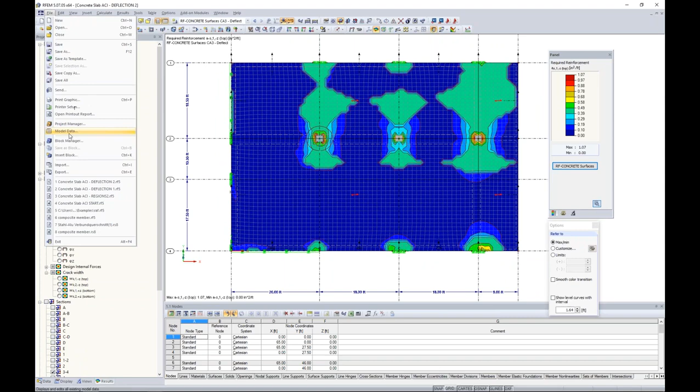One quick final thing here that I want to show you guys, let me go back to my current module. And I want to take a look at my graphics, my results, and my required reinforcement. I'm looking at the top here. I want to quickly show you how to export this into some additional programs. If we just go to File, Export here, we have the option to export as a DXF file. We have some other options here for reinforcement design, Nemetschek, Strakon.

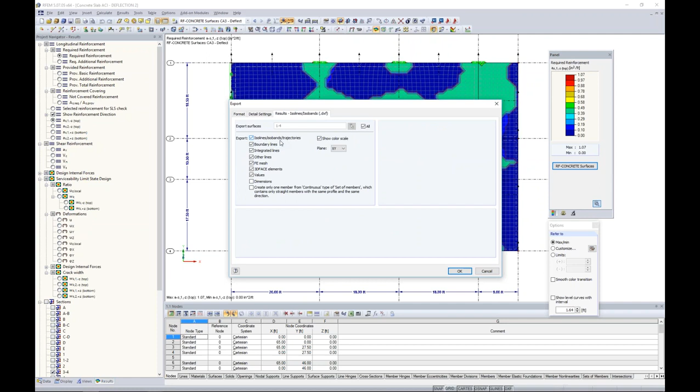And if we're using a DXF file, we have this additional tab here where we can select our surfaces that we'd like to export, and we can export those isolines and isobands. We just choose the projection plane, we click OK, it's going to save our DXF file here. And then I went ahead and just imported this directly into AutoCAD. So this is everything taken directly from RFEM straight into AutoCAD.

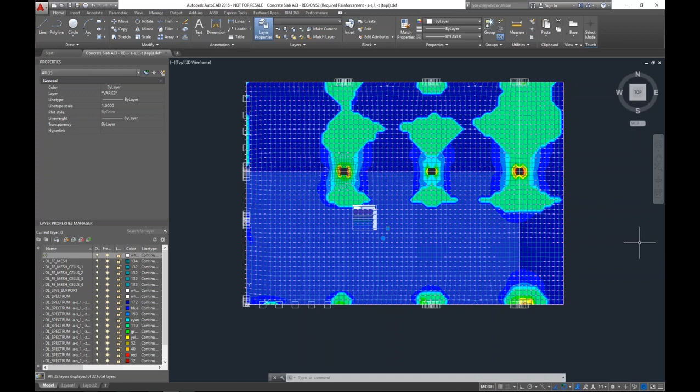I haven't done anything with it here in AutoCAD. And you can see that we have all of our contours shown. We do have a color scale down here. And then you can further use this for your detailed drawings of your reinforcement and such. So that's essentially what I wanted to show you guys with exporting. With that said, that basically sums up the webinar today for design of our concrete surface.